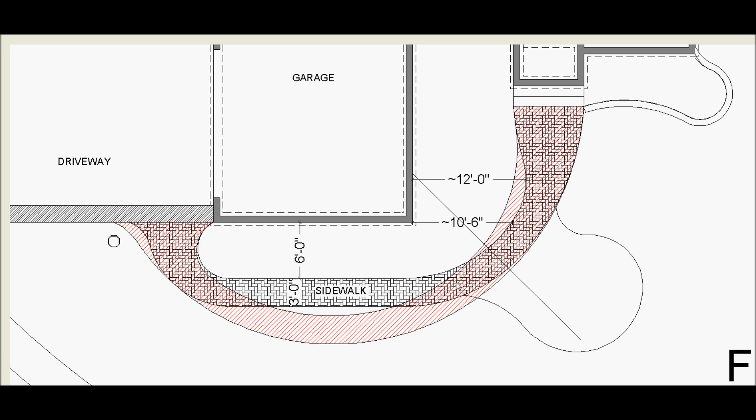Alright, to continue our review of this sidewalk, this is where we had arrived after design review meeting 2, where I had combined sidewalk E and sidewalk C to arrive at sidewalk F, which was this one here. However, you had asked me to combine this red sidewalk, which was E, with C, which looked more like this, and I had done that, but you did not care for the way I swung that in there.

You liked it more when the arc was just round like that. So that is what G does. It maintains 3 foot here and then swings that like that. And so that's the end result of that modification to arrive at G, which is this.

Next, in case you wanted more, because you had indicated in the email maybe that you wanted a 4-foot sidewalk or a wider sidewalk, I kind of changed things a little bit to make this sidewalk 3'6". In addition, I horsed around a little bit at this end. I talked about maybe the concrete wants to fall off here or break off because of this acute angle, so I've changed that like that.

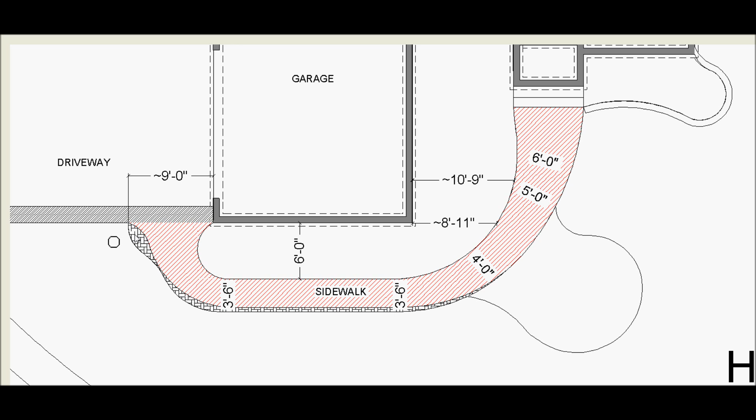I'm not pleased with the result, so I moved quickly along, but nevertheless you can take a quick look at the end result of that modification, which was something like this. And I quickly left this at 3'6".

This is all unchanged up here, but I changed this approach here, and I like this a lot more. I'm still coming in at a 90 here, but with less rigmarole and more simplicity here. So we're still 3'6" sidewalk, and that's the result of that.

Finally, whether or not you want to bring that all the way up to the garage, that's up to you. It seems like a lot of sidewalk here, but especially for as thin as it gets here. And that's the end result of that at J.

There's another little option, maybe that's not so wide, and you pull it back a bit. This margin stayed the same. We just brought this back, a little bit less sidewalk here. Again, though, that's just something that's really flexible and up to you.

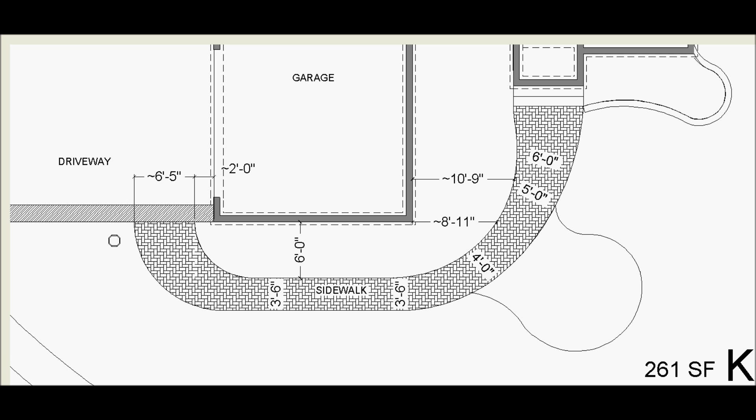Finally, I think as this is 3'6"... I think the next thing I did, well, that's that 3'6" with this back here. And then next, because you had mentioned the 4-foot sidewalk, okay, what if I just left this side alone for these next permutations? Just there, you can have whatever you want to do down there with anything we've looked at so far, really.

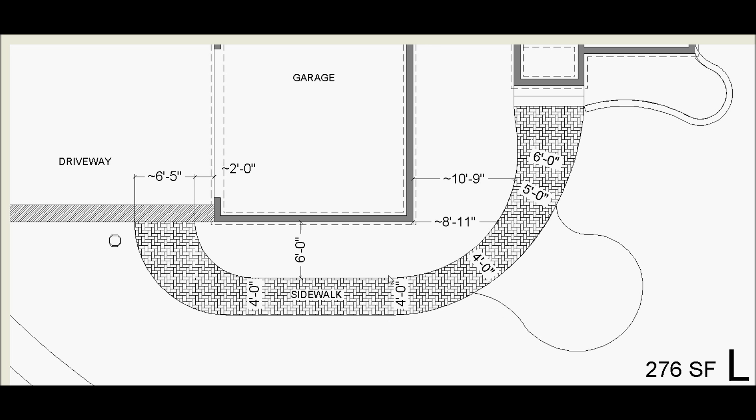But this one, I widened this sidewalk all the way out to 4'0". This is still unchanged up at this end for these next couple views, but the sidewalk is widened to 4'0" all the way across, maintaining that 6-foot space in there. And that's the result of that.

Finally, I was not sure. I don't mind this terribly. What we've had, this is... these two are basically symmetrical. The first several feet are symmetrical here before this swings around.

But I wasn't sure, I wanted to experiment with, well, what if we came straight off of that and then swung around? I was not overly fond of the result.

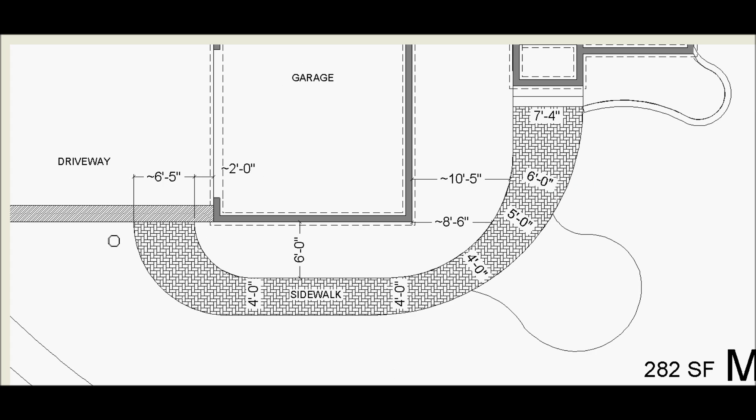This is it here. And so the final thing that a person might do with something like that is to just bring them both off and keep them both parallel to a certain point, and then they break. Essentially just widen out, or lengthen out, that part that's parallel.

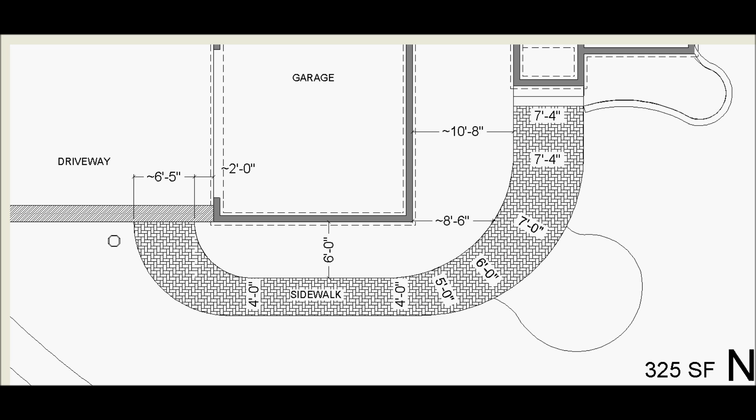Was N, and you end up with something like that. It was a lot of sidewalk, but maybe that's what you're looking for.

And certainly I kind of like the result. If this was what we were going to do, I like the result of this better than that. It just seems a little more balanced.

But that's that, and now just for fun I'll run through all of these alternatives A through N from the start. Sadly, the effect isn't going to be as cool because the view changed so far along, but here's where we started, and I'm just going to flip through these silently.

And back again, to the existing. I want to go through one more time and make my...

Okay, I like E, G, J, and K, L, and N. But don't let me influence you.